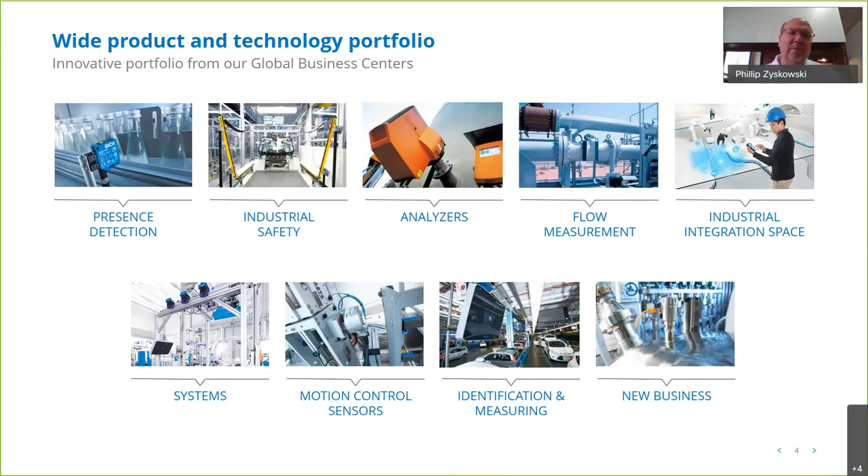I mentioned this legacy, and it goes back to 1946, obviously, but some of these models you may be familiar with. Some of these models are probably before your time and my time. And a lot of them that are pictured here have a different name on the outside of the box. Early on in the 60s and 70s, a lot of the dust analyzers that we marketed into the U.S. had a different company name on it, so we didn't have the presence here yet to support EPA and compliance regulated measurements.

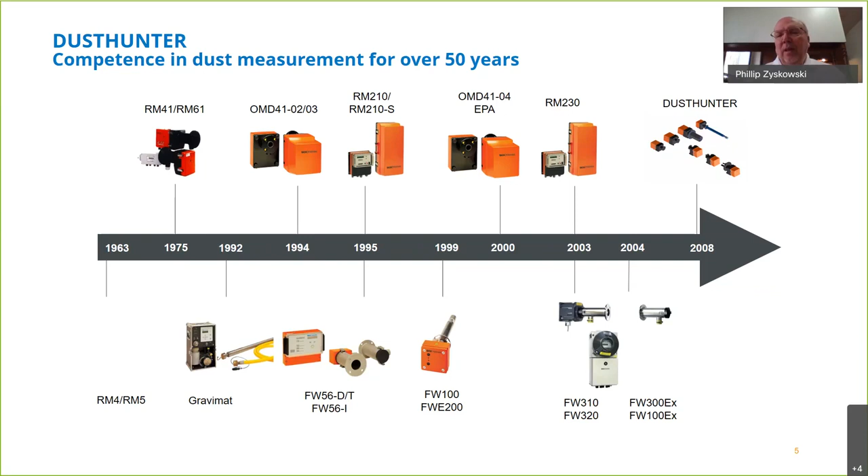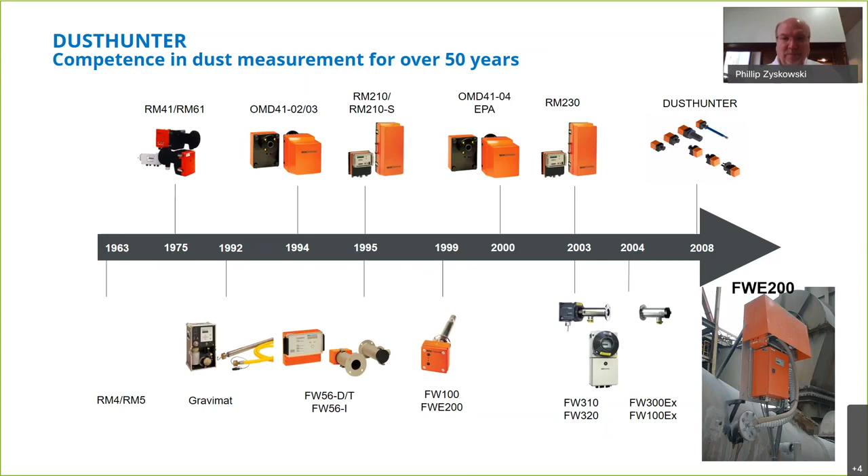Really at the end of 1999, the FWE 200 was really maybe the dust analyzer that put SICK on the map, so to speak, with our name, with the innovation, being able to measure particulate in a wet environment. This was new, and something we're really proud of. From there, I wanted to jump in particular on the Dust Hunter SP30.

So the SP30 is a new analyzer, a new monitor, and unlike the other developments that you saw on that chart, that timeline, this is really a simpler analyzer. And so it seems as regulations got stronger and tougher, not only globally, but in the U.S. in particular, always analyzers and monitors had to become more complicated and more complex. And that's why I got excited about the SP30, and I wanted to do this presentation for customers, and in particular power plant customers.

This is something that's different for us. It's simpler. So we've taken out moving parts. We've made it more basic, and along with that, we've made it inexpensive. And so the idea was to actively fulfill a need in the market for an inexpensive, accurate way to monitor dust. And so some of this is a little bit dry, but I have to at least lay out the specifications and also introduce you to the technology. I think that's probably a good way to start.

What's significant here, and we'll get into each of these a little bit in the following slides, but for you to realize this is a scattered light device, and in particular forward scatter. We'll get into what that means in a minute. The spectral range isn't as important. It just tells you the laser power and the laser operating spectrum.

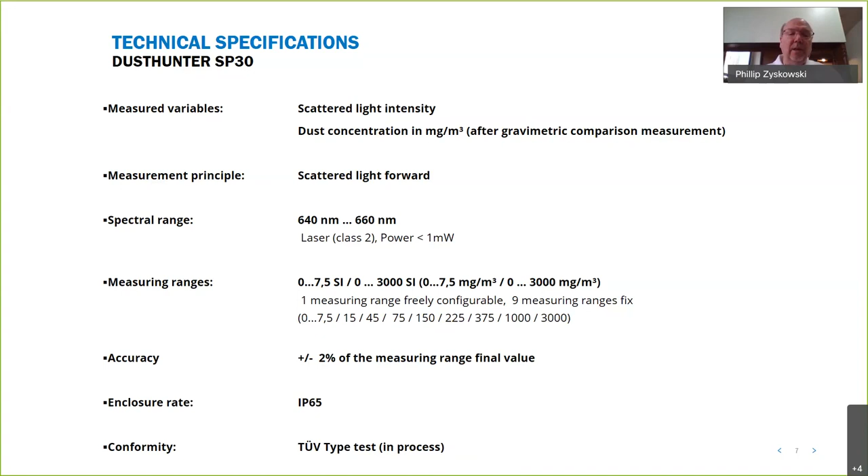And measuring range is very significant, and that's what makes this monitor very versatile. So we go from 0 milligrams per cubic meter all the way up to 3,000 milligrams per cubic meter. So it's a very extensive measuring range and gives us the versatility. Accuracy is right up there, what you would expect from a scattered light device. And then the packaging and the testing is, again, everything you would expect.

So essentially, we've got 2 models depending on the length that need to go into the ductwork or the stack. And optionally, and this is what goes into that claim that I've made about it being inexpensive, you do not need a control unit. Everything that you see on the left side here is standalone. And so you don't need an extra device to get your output or your digital input. And so that's a way we can make the unit less expensive.

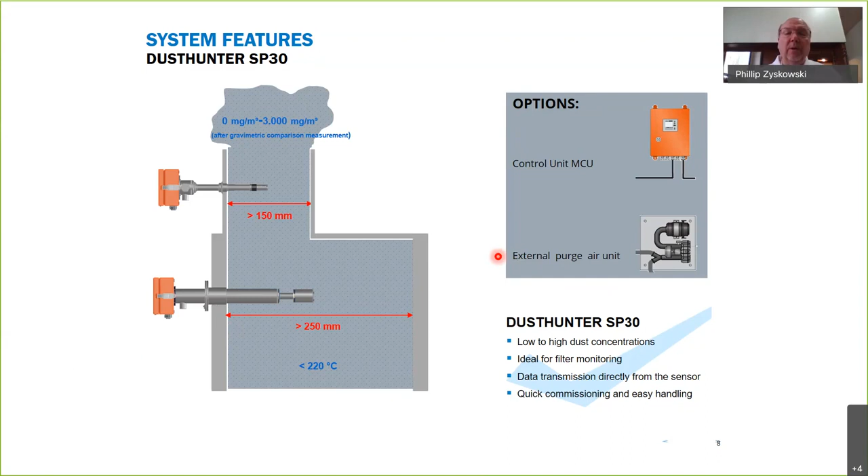Also, we do have an optional purge air unit. So as it comes out of the box, for most applications, the purge air is not required, but it is an optional feature.

Excuse me a second. So scattered light forward. It's a technique that's used worldwide. It's not something, as I bragged about Dr. Sick earlier, that he invented. This is a very common measuring technique for measuring dust particles. I'll get into what the forward means.

So if you look at the, wait a second. If you look at the measuring cell, you can see this is where we're measuring the dust as it's flowing through the ductwork. In this case, it's laid out like a stack.

And we've got a sender unit, so that's located in this, where the laser resides. And then we also have a detector. So the detector is also laid out in this module. And so what we're doing is sending the light beam through, and then it's being collected on a fiber collector, and the fiber is coming back with that light into the detector.

Now, what we're calling forward scatter is occurring here in this measuring path. So our light beam is coming this way, our detector is this way, and what we're seeing is our light beam reflecting off of the front of the dust particles. So that's hence the forward scatter, forward or front.

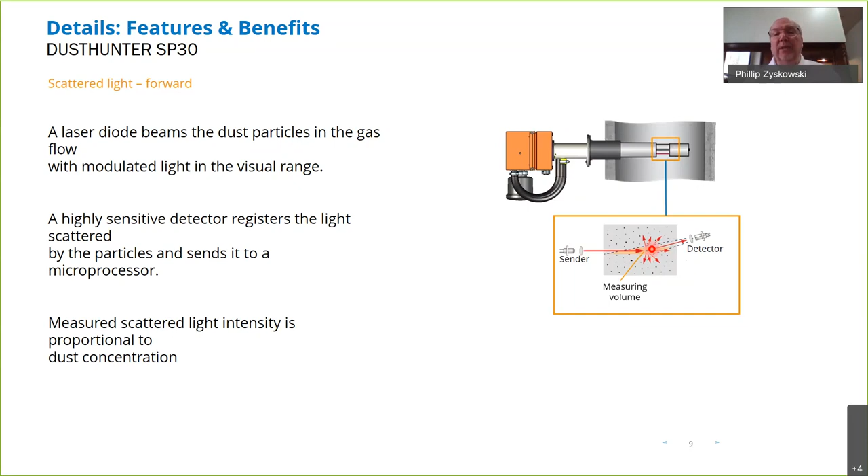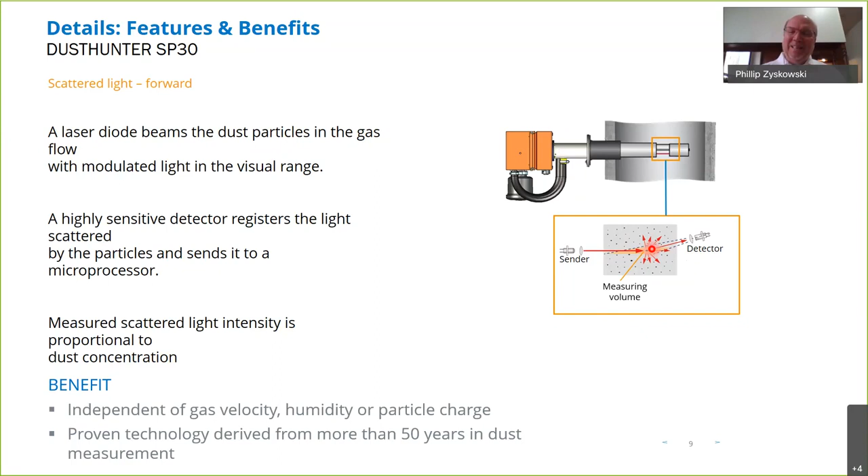And we have different techniques. In some cases we use back scatter for other applications, but for the Dust Hunter SP30, forward scatter was the best and most robust and gives us that wide detection range of different particles. So the benefit there, it doesn't matter what velocity you have, how varied your humidity or particle charges are of that dust. And again, it's been a proven technology. This isn't a beta type technology. This is something that has been proven over the years in the laboratory and a lot of our other installations.

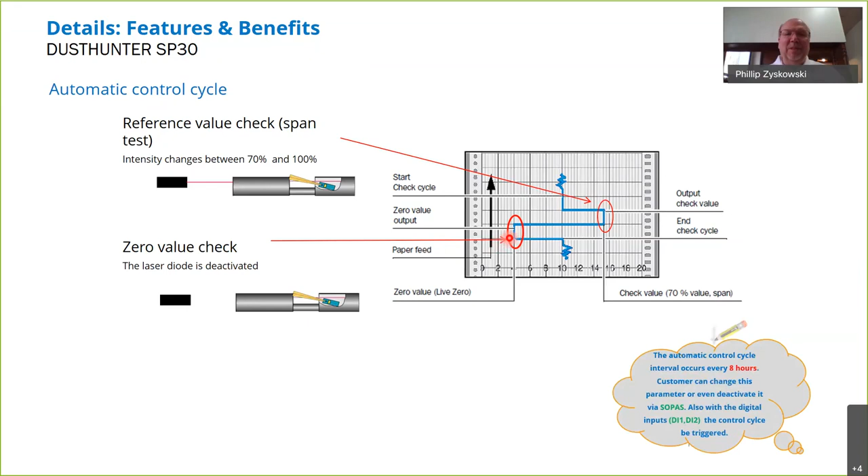So this happens every 8 hours. You can change it. We'll get into SOPAS in a minute to show you how you can do that in SOPAS, our software, but it's user selectable. So it's a stable measurement, maintenance-free intervals, and very low maintenance cost.

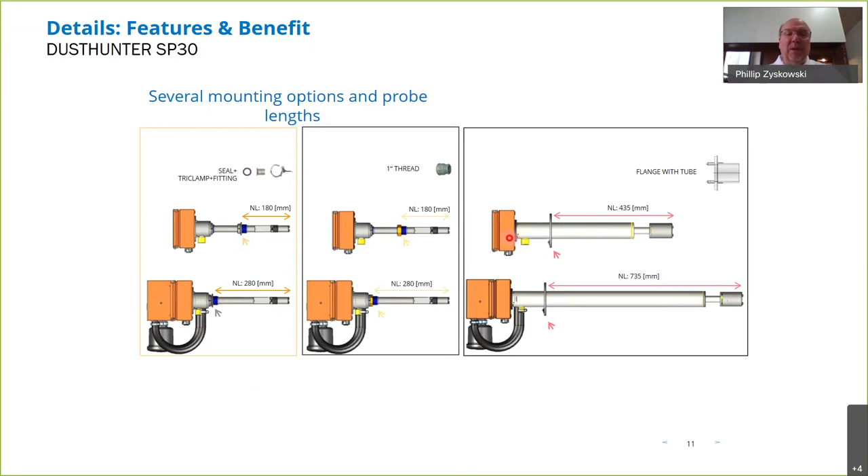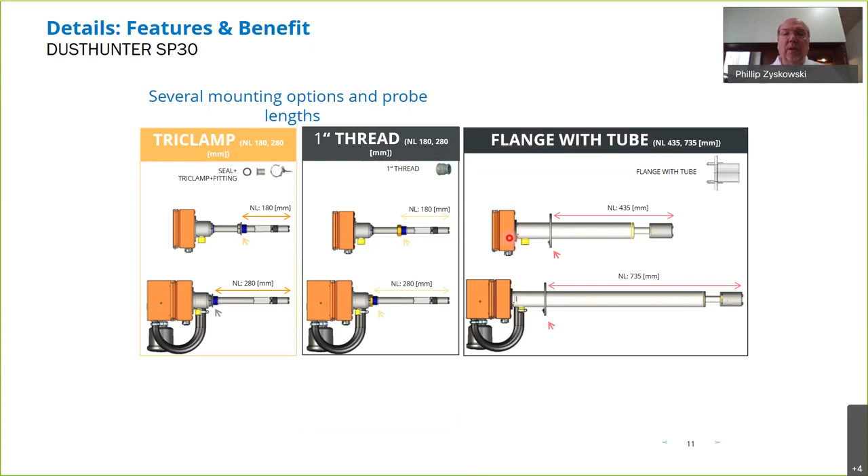Just briefly, I mentioned there were 2 basic different models. So for the smaller ductwork and smaller path lengths, we've got threaded tri-clamp, and we can also go with like a flange that's welded onto the ductwork and with a larger length. So no matter what size your duct, we've got the right length available.

A lot of words here on this slide. I'm not going to get into all the details other than what makes this unit so versatile is the fact that there's 2 calibration curves and 11 measuring ranges. All can be selected from the analyzer itself, the monitor itself. You don't need a control unit to do that. And so this gives great flexibility. So high concentrations, low concentrations. It also eliminates the need to do a gravimetric correlation. So you can set these ranges based on what you know, and you can set 2 calibrations based on changes that you anticipate.

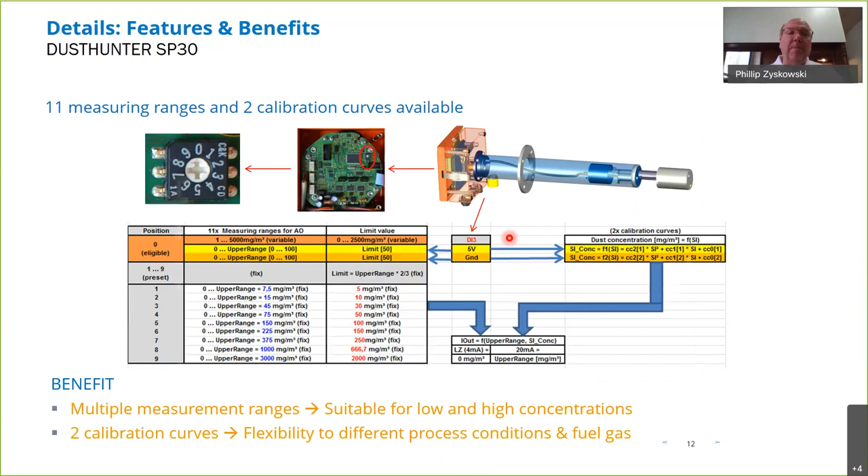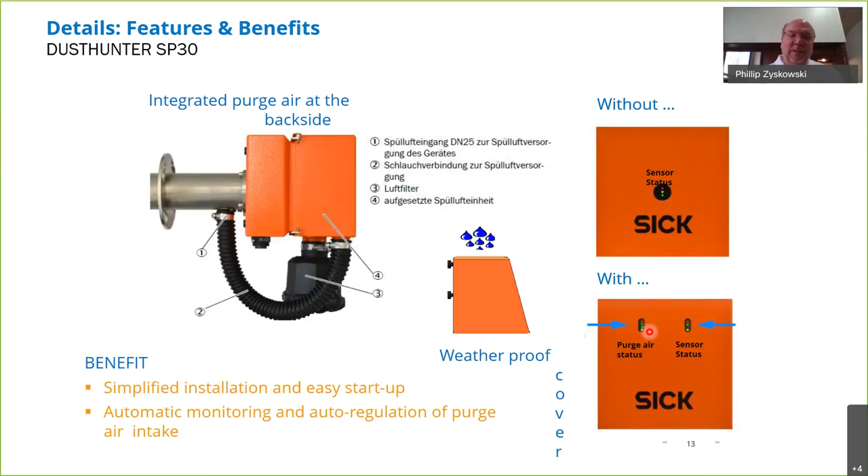I mentioned the available purge. I think it's important for you to understand that that is not required, but again, what's kind of neat is with the purge, you've got a purge status light on the outside, and without it, you just got the sensor status. So when you have the purge unit, you also do have a little LED bar indicating the integrity of your purge. So it's a visual indicator. You don't need any other type of control module. So it's very simple to set up. And with the auto regulation of the back purge, it's very low maintenance.

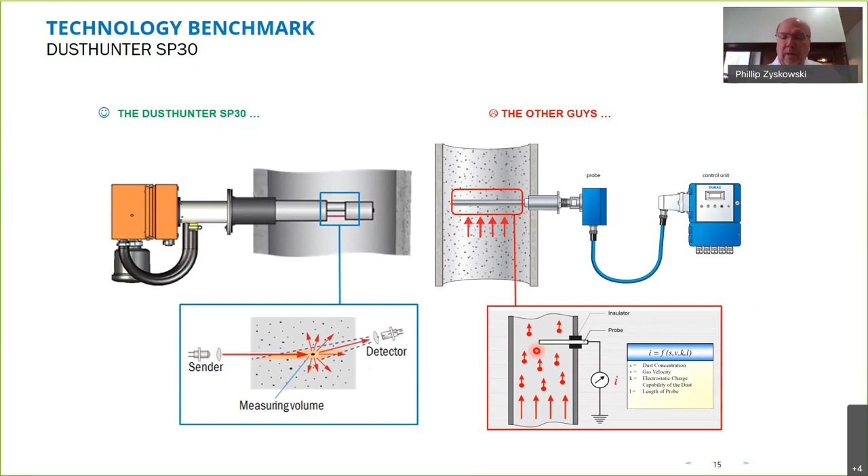So typically, and this is what I got excited about, typically for broken bag or ESP applications, a triboelectric type technique is used. And we got into how we're using forward scatter. I'm not going to get into the details on the triboflow, other than it's an electrostatic measurement. And we did some benchmark testing versus the triboflow. And for a lot of measuring applications, there are some weaknesses.

So there's a velocity weakness. For triboflow, you need to have a continuous velocity. There's a contamination issue often that causes drift for the accuracy and the repeatability as dust particles cake up on the rods. And often this requires maintenance. Someone's got to clean the rods. So for high concentrations, typically triboflow doesn't work very well. It is suitable for really small ductwork.

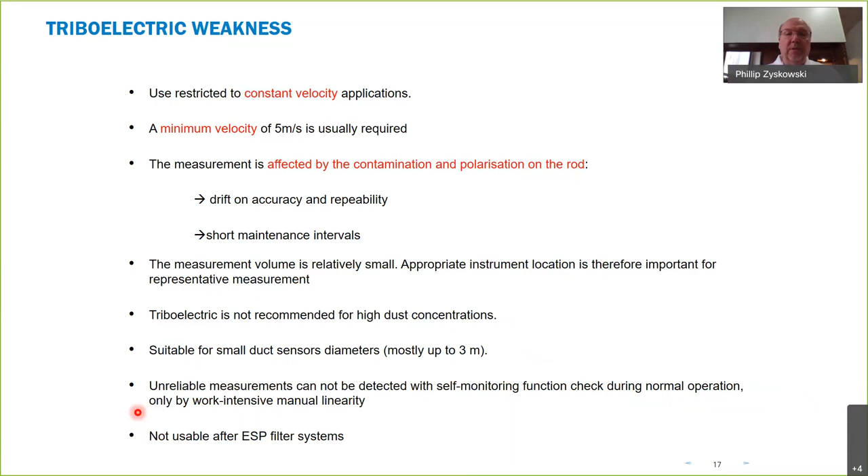And I showed you that earlier, that little self-check we do. There is really no way to do that with a triboflow type technology. And certainly with all the electrostatically charged particles coming directly off of an electrostatic precipitator, triboflow is just not recommended.

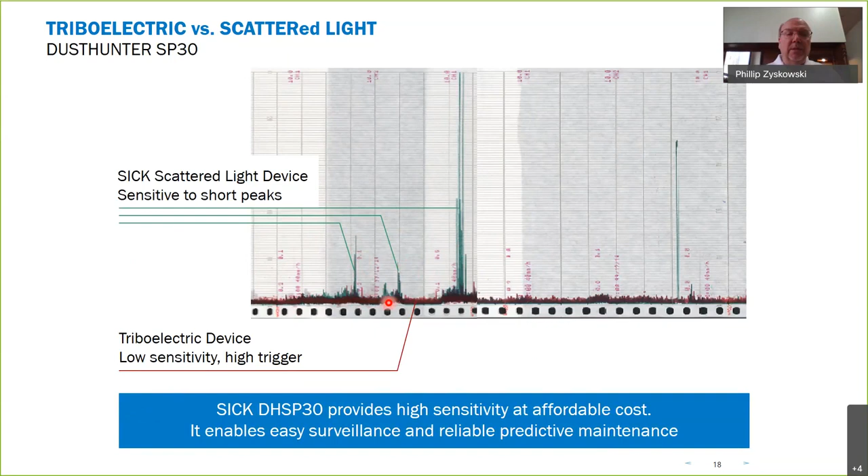Just a visual. This is a side-by-side benchmarking our SP30 versus triboflow, and you can see how the SICK analyzer picked up some of these distinct peaks and spikes that would be related, in this case, to broken bag detection, whereas a triboflow device, you can see it just really didn't trigger much of an event at all.

So again, if your application and installation is always constant, and the dust particles are always charged the same, and if you don't need linearity, then triboflow would be a way to go. You're just looking for some basic indication, very wide, accurately measured trend. If you really need to measure your dust load, independent of those items and those factors, then scattered light is the way to go.

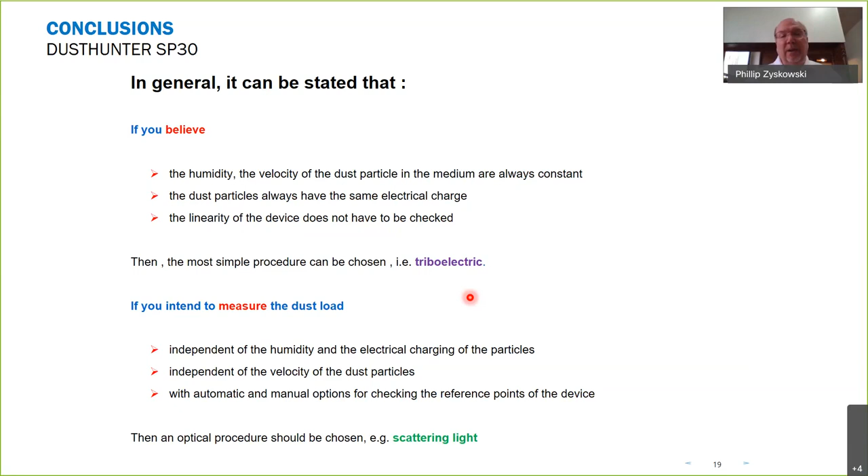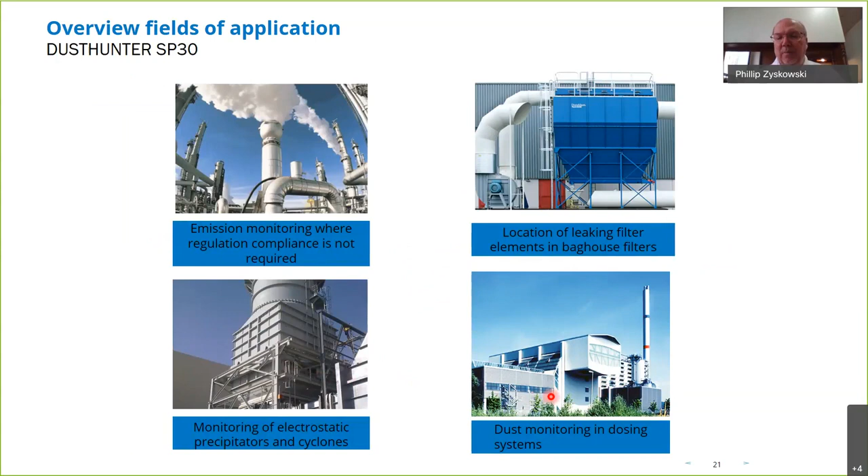So the SP30 we really, again, developed for, I got to put the disclaimer out there, emissions monitoring where regulation compliance is not required. Leaking filters on baghouse, that's really what we're going to spend the rest of the morning discussing. ESPs and cyclones, and then dosing is probably more steel related and not so much in the power industry. But it's a typical layout. Got your dust collection system here.

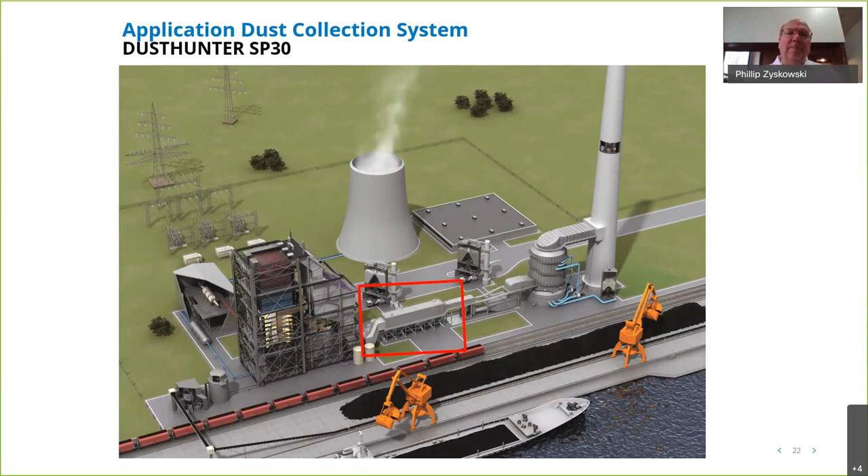This is a rendering of a typical electrostatic precipitator. The Dust Hunter on this application, we would imagine being installed in this ductwork here on the exit. And really, the only control that could be realized would be maybe your rapping sequence.

We found early on when we developed the wet PM CEMS that often the rapping sequence for the ESP was way out of sync, and this caused excursions well above emissions and permits. So we would envision the Dust Hunter alerting you of that before it became a problem further down the line.

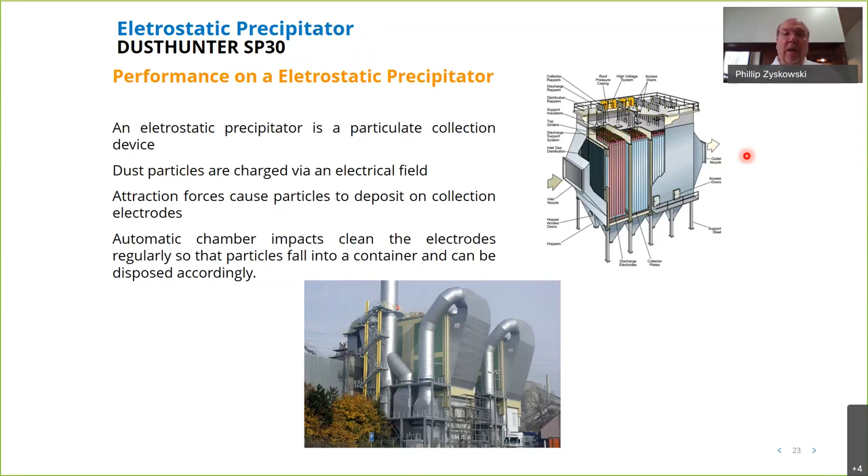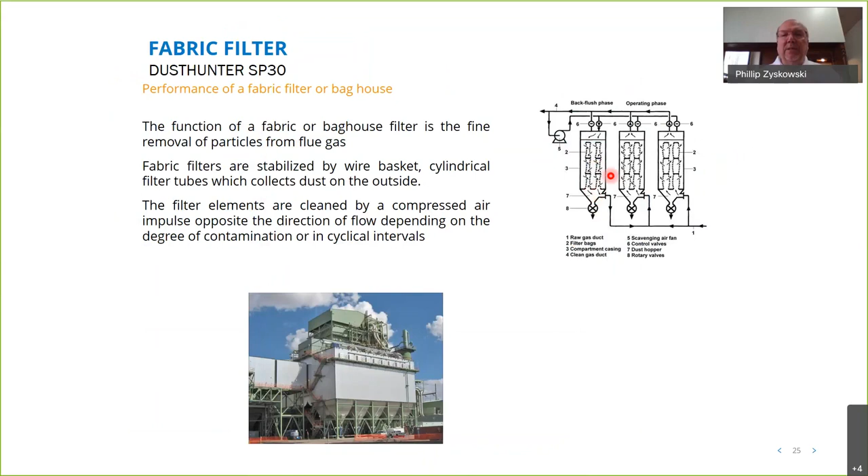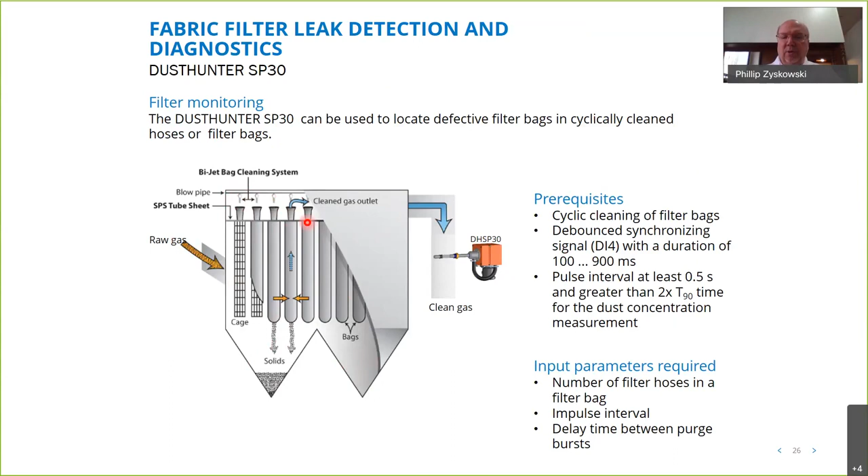It's a little bit better image of what's going on inside. You've got gas coming in. In this case, this is a Bi-Jet bag cleaning system. So you've got a pipe and valves that allow these bags to be blown out. Solids are collected down at the bottom, and this happens on a regular sequence. So these are usually done in a timing sequence, and I'll show you a little bit more complicated slide here, but we've got to talk about it.

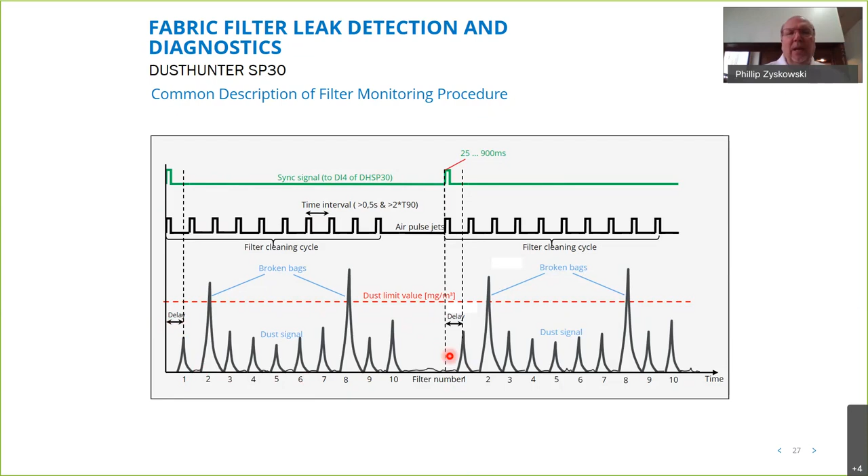So the key is to synchronize the SP30 to your baghouse cleaning cycles. And so you can see here, here's the signal coming into our Dust Hunter. And you can see these time intervals, the sawtooth here, and what happens when broken bags occur. And these are specifically filter numbers. So there is a delay here, and we can build in that delay as well. And I'll show you in a second how that's done.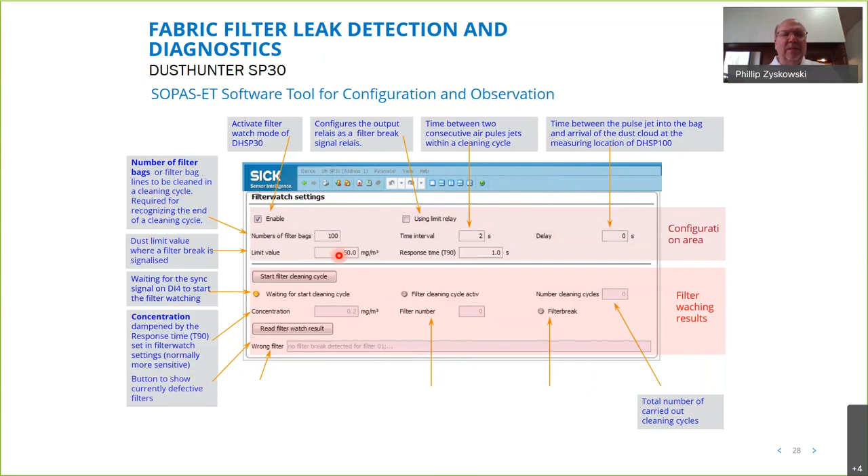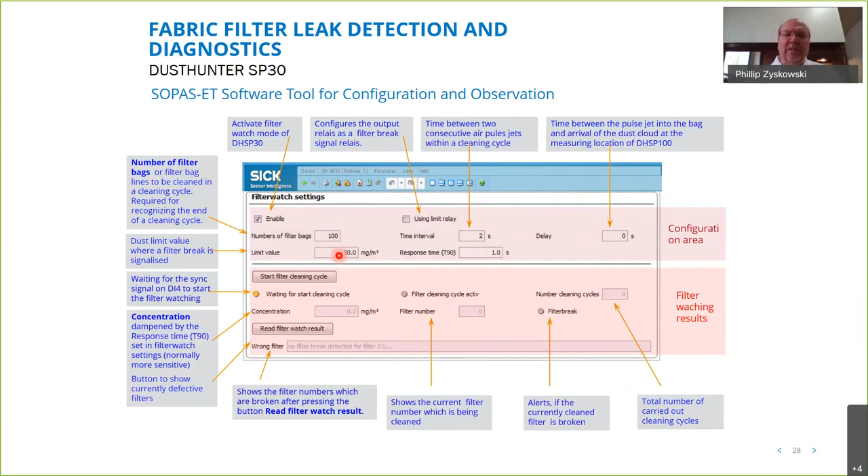In this case, we can dampen the concentration. We can show which filter failed or is broken. Shows you which filter number it's on. And we'll trip a relay on a signal if it's detected as broken. So this is the most common filter configuration.

I'm looking at the clock. We're running a little bit short on time. I want to leave some time for questions.

So, but this would be a layout where the DUSTHUNTER SP30 would really shine. So the key here is that the valves are individually activated. So that's represented here in these different chambers. And so knowing which valve is activated at the time, with that built-in delay time we showed you earlier, the Dust Hunter SP will determine which bag in this row had an issue with breakthrough.

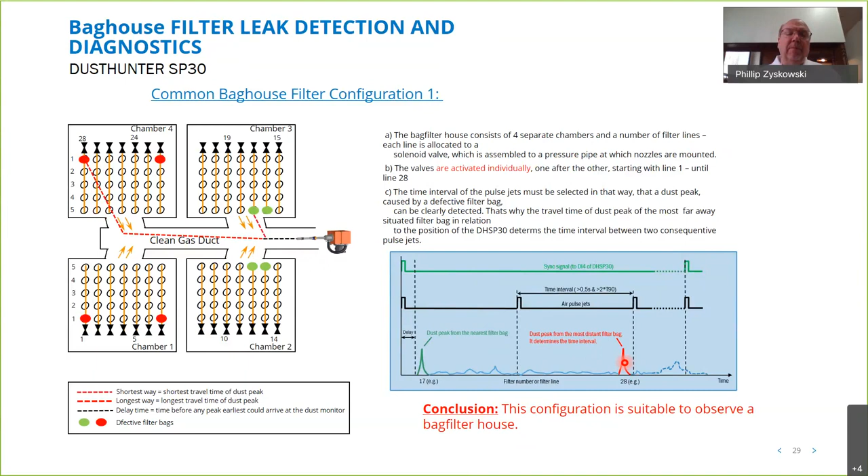And you can see that indicated here. A large peak, and that occurred at that particular time. So it's really a timing sequence, knowing where the cleaning was being done at the time the Dust Hunter saw an excursion.

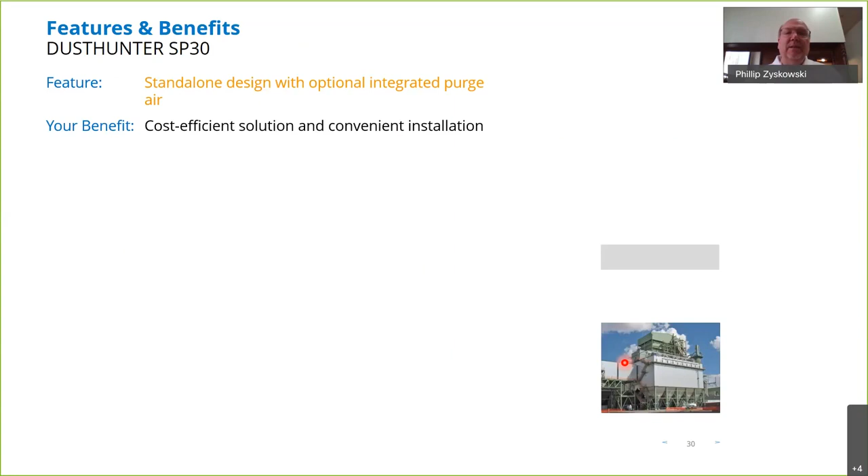So in conclusion, it's a standalone design, so it's very simple and cost efficient. You don't need a lot of extra bells and whistles. We've got both analog output and Modbus that come directly from the sensor without having to go to any type of alternate or extra piece or box. So that gives you very easy commissioning and startup.

And then different mounting options and probe lengths. So we're not stuck with a one-size-fits-all type mentality. We're able to provide the right solution for what you have on your site. And so this makes it adaptable for multiple types of bag houses, multiple types of ESPs.

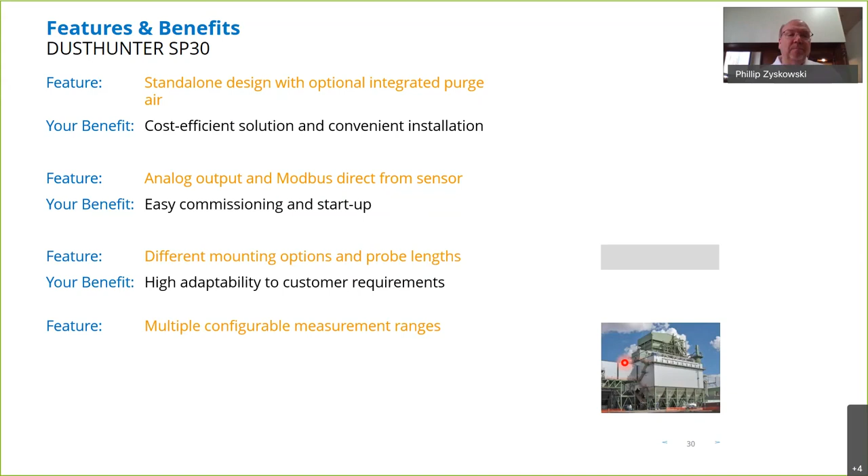And because of the wide detection range, you can see that we're able to measure anywhere from 0 to 3,000 milligrams. And then the last feature, the two calibration curves being stored in the sensor, gives you a lot of versatility and also capability for different process conditions. So that gives us that flexibility.